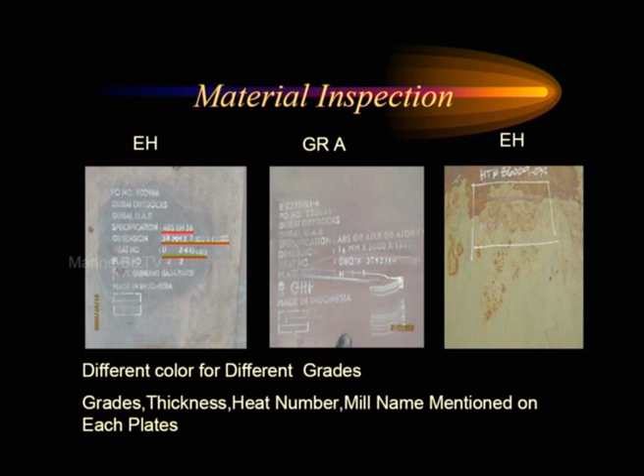Hence, we have a color code that we're instituting back into the dry dock. You noticed years ago, some of you old people here, grade A used to be red. The last couple of shipments we had come in was gray. That's going to be finished next month, hopefully. A little bit of confusion.

These are some of the instruments our QC guys use: gauges. One of the main problems we have coming out of the stores, we have a lot of pittings in the plates that are stored in the lower pods. This is the way we check it. We check the tolerances and what's allowed. Let's go.

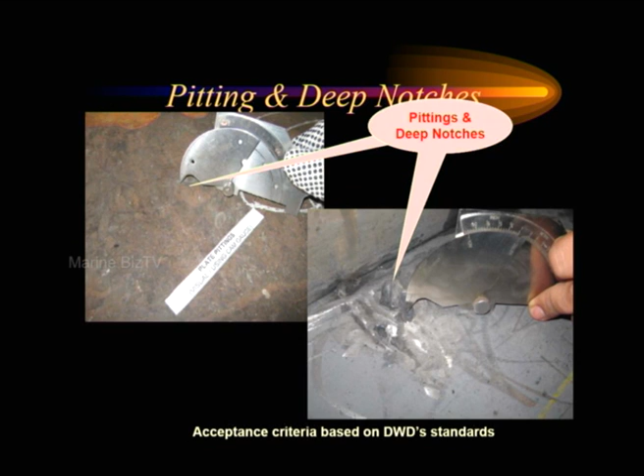We have a set of standards, as we mentioned, that we try to follow every day, and we try to make sure that you guys are aware of them. If you make mistakes, this is what you follow, guys: talk to our QC people. Our inspectors are on board every day. I'm sure they can help you out.

On your drawings, as our inspectors go aboard, check the material grade, the thickness, revision numbers are right, and see if there's any post-weld heat treatment required. Drawings are the key. Make sure you have the right revision, and we encourage our inspectors to be very vigilant with this.

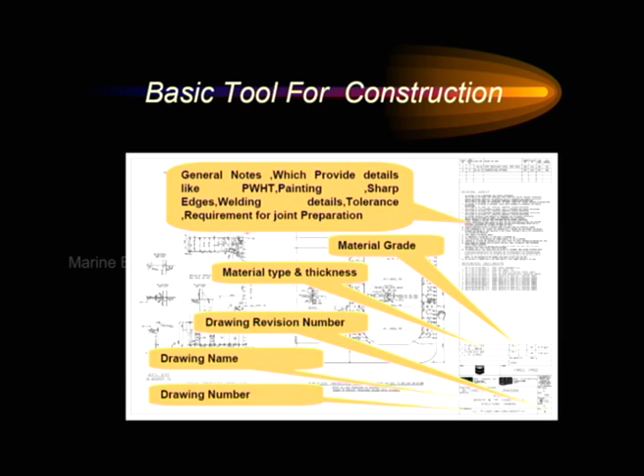Reading of drawings is very important. As I mentioned, material grade, copper nickel, could be carbon steel, could be duplex. Verification, post-weld heat treatment, NDT, non-destructive testing.

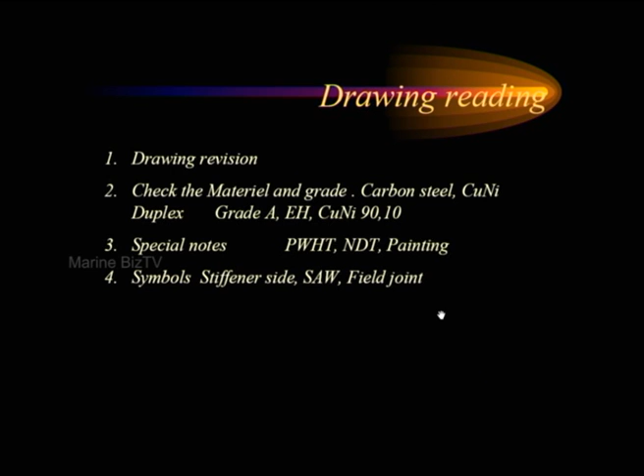Very important. And gentlemen, I threw this in there for a little laugh. When you mark a revision on a drawing, you do not have to follow every little detail. This actually happened. We usually put a cloud on a piece on a plate if there's a revision, but our preparator was pretty conscientious, don't you think?

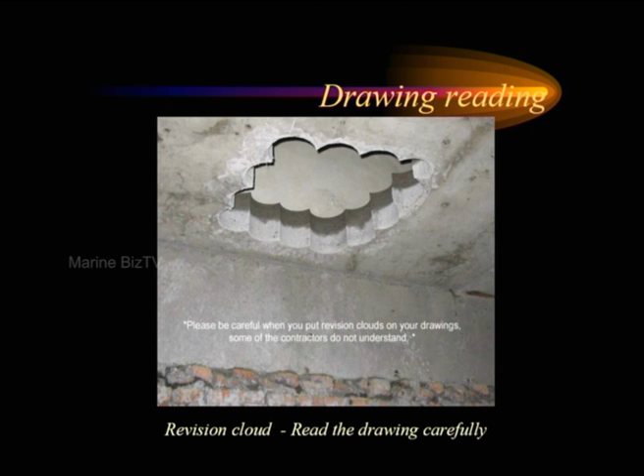This is our burning process. Notice the bevels going on the pipes, coming through the cutting stations.

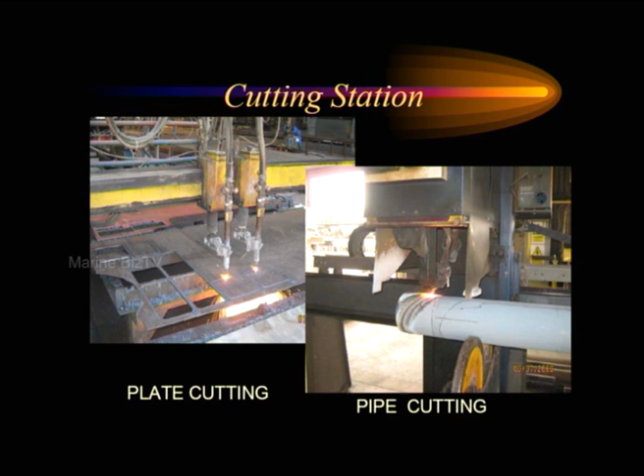There's our QC in action, doing some dimension checks. And gentlemen, this was quite an achievement. We just finished 2 rigs for Aker, and our dimensional control team did a fantastic job. I have a best fit program, and some of these blocks that went together were well within tolerance. And the overall load of that block and that unit was fantastic.

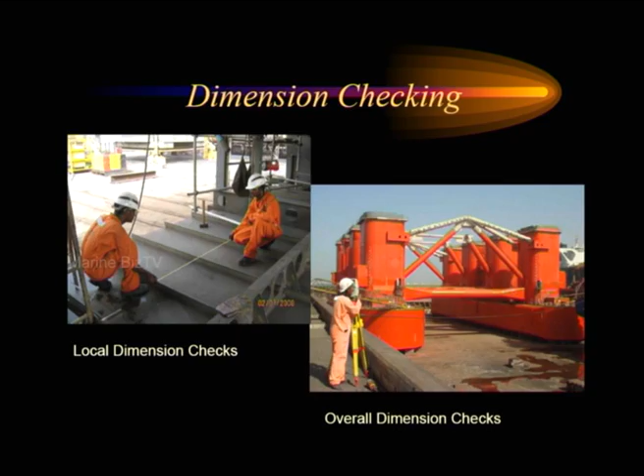Dimensional checking, as I mentioned, there's a lot of new equipment in-house now. Markings, shrinkage allowance. We're building some seismic vessels right now. We're having some problems, but we'll get it all sorted out. We have 8 of them to do. First 2, we're learning quite a bit from them. We're working with 10 and 11 milli plate. Of course, you get a lot of shrinkage in that area.

Requests for dimensional checks can be done on 436 for your subcontractors. We're here to help you guys. You have to put your hand up if you got problems out there. We know you have problems every day, okay?

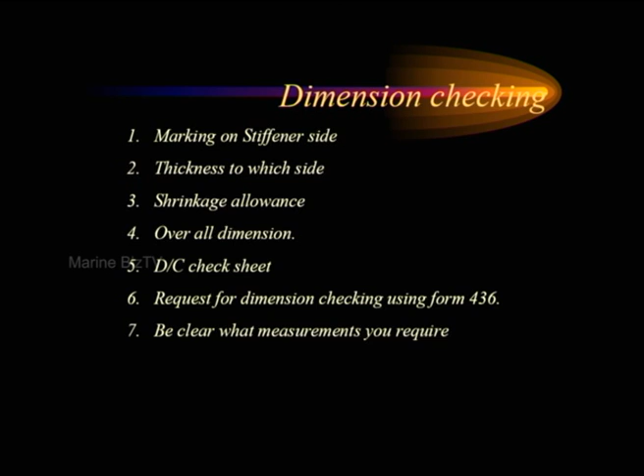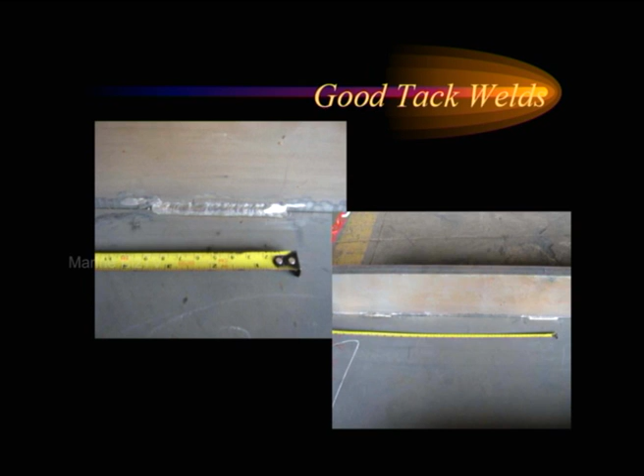Good welding is required on the plates when we're tying together. Tack welds need to be maintained minimum distance from free edge. Good practice of tacking. Notice the free edge.

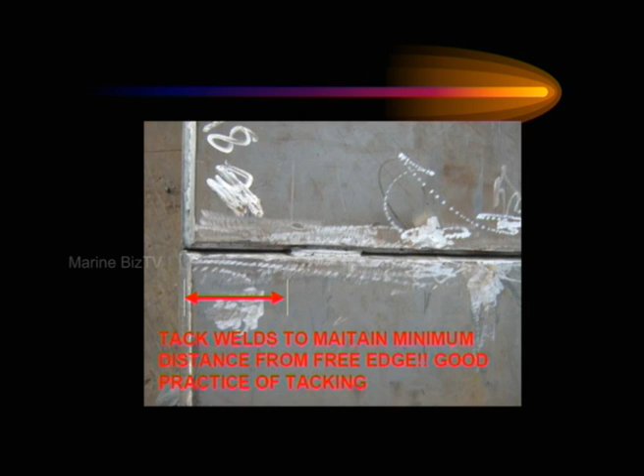Some of the tacking, our boys have noticed, is not up to scratch. I'm just showing you some examples here.

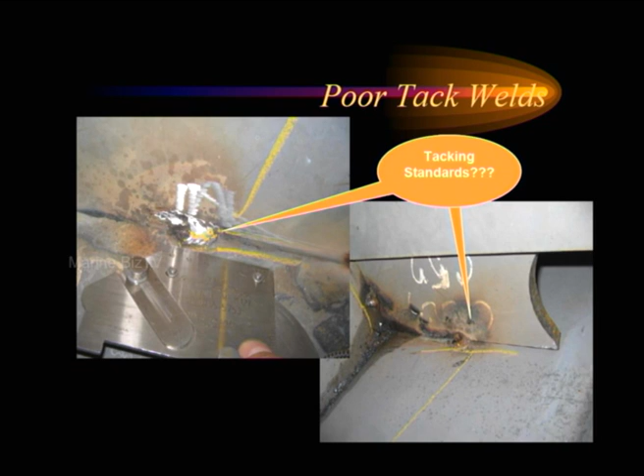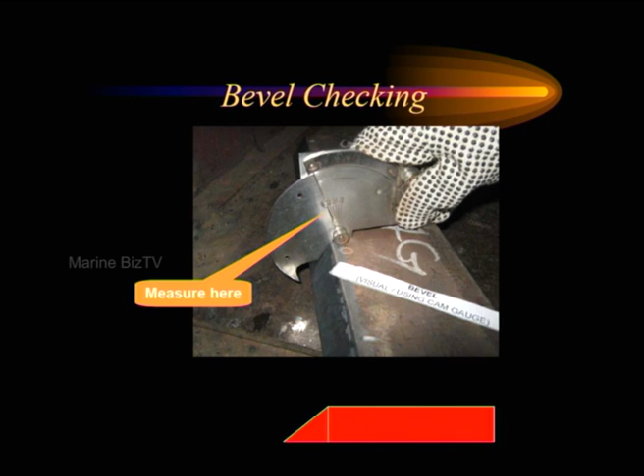Bevel checking with cam gauges. Notice the bevel. Misalignments, very important.

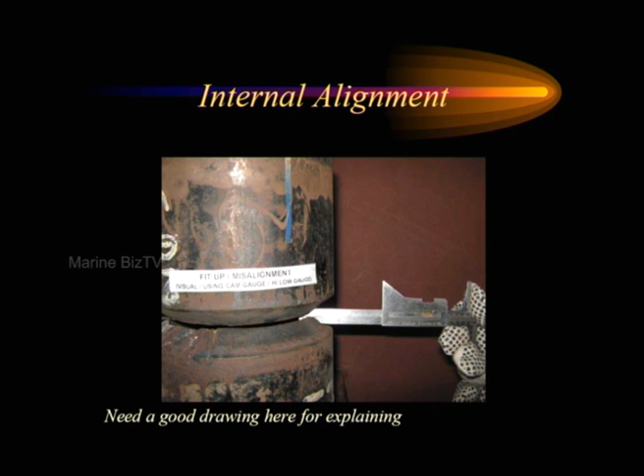Pipe, high-low gauge. Notice the bevels. The main thing about pipe, for you pipe fitters in here, is the gap, penetration. That's what QC watches. This is just one of the gauges we use. High-low gauge is called. Your companies should have them in your shops.

Again, the boys checking the root gaps. We like to close them up. Notice the rough cutting here. All kinds of things a good QC guy can pick out, eh?

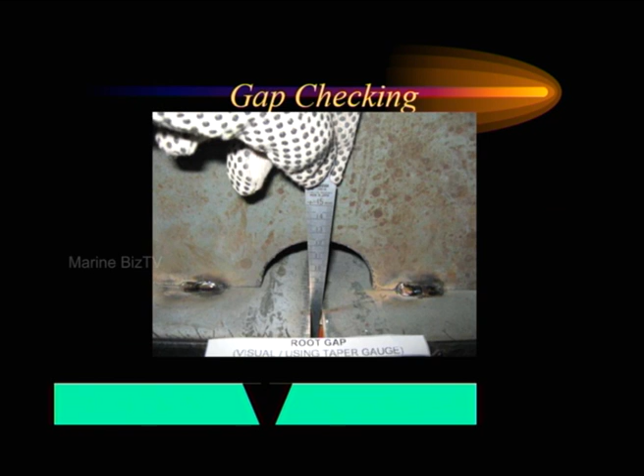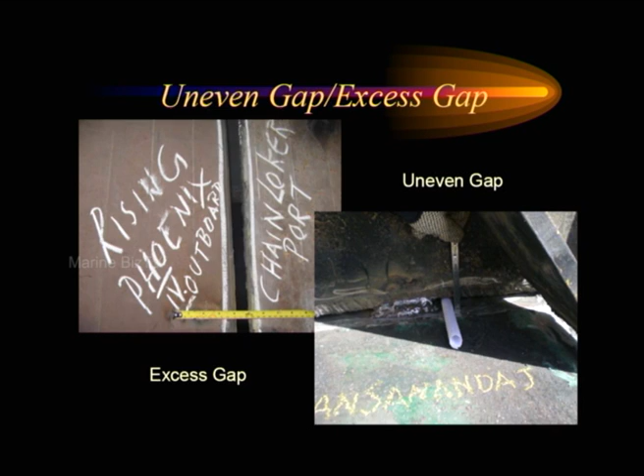Uneven gaps. Irregular, we call them. Excessive gaps. Any questions on excessive gaps, speak to our welding engineers down there. They have a new process now, working with a little bit of ceramics. So we need 5 to 7 milli gap, but anyway, we try to keep them tighter in regular fit-ups.

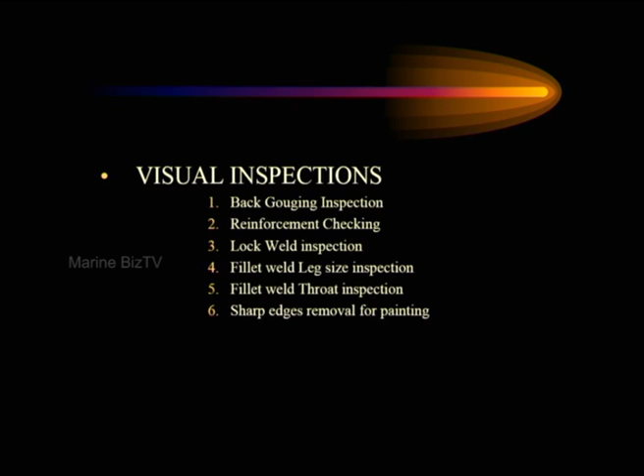Visual inspections is the inspection we do. Reinforcement, lock welds, fillet welds, sizes, throats, legs, and sharp edges, guys. The reason why I mention sharp edges, paint these days has a tremendous implication on steel work. Years ago, it wasn't so much, but now you have to grind all sharp edges. It's a big pain for everybody, but it's got to be done.

Any kind of tools to measure this? There you go, some of the welds we're getting. Bad cutting here.

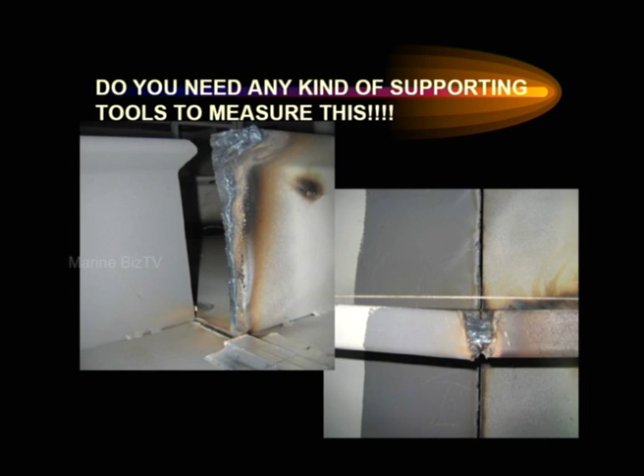Good back gouging, guys. That's one of the things QC and the superintendents check all the time, what kind of root we're getting. How deep is the gouging?

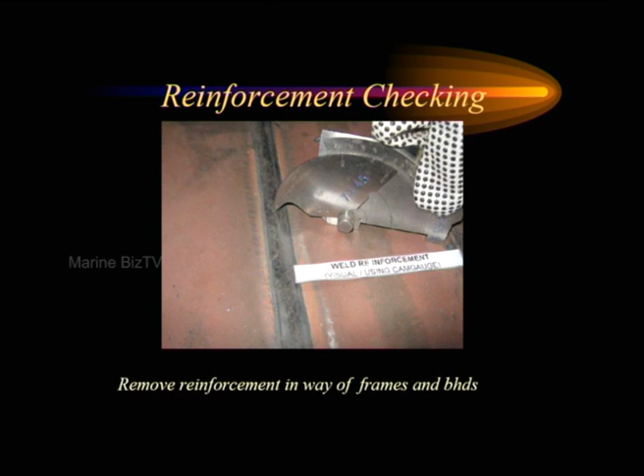Reinforcement checking on your plates. We like to have it below around 3 to 5 milli. Here's some of the instruments our boys use, checking for lock welds. Should have those in-house.

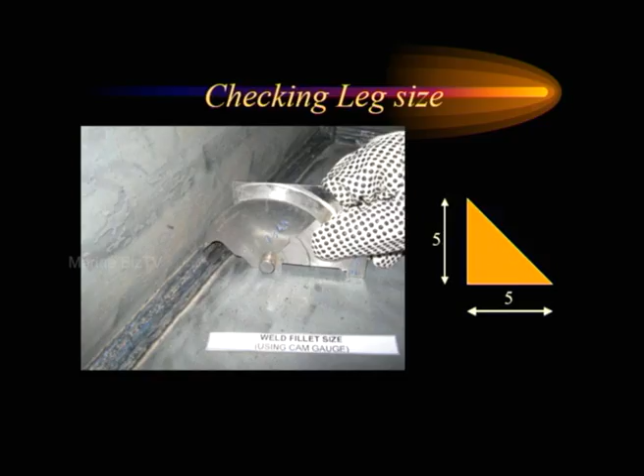Again, checking the fillet size, using the gauges. All your QC guys should have these. Very important. You've got heavy steel here. You've got about 3 or 4 runs weld here. Looks good.

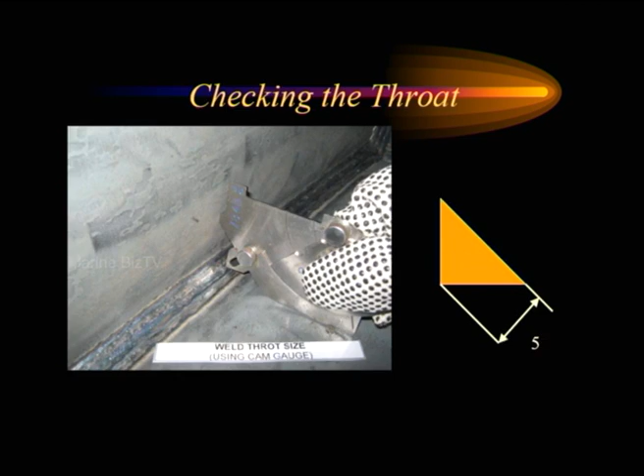Checking the throat size. Notice where he is. Sharp edges, guys, very important for paint. It's got to be clean. We can't get away from it.

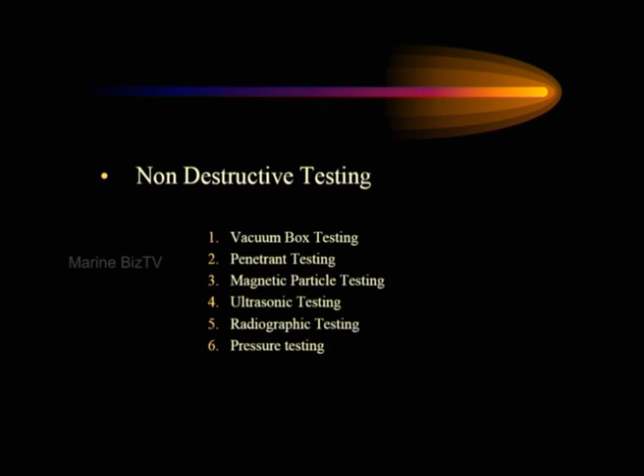NDT, I spoke about that earlier. These simple processes we go through to try to sell your work. Either a vacuum test, Penetrant test, MPI, UT. A lot of UT these days, guys. We're getting away from the x-rays.

It's all according to the superintendents, the surveyors we deal with. But there's more and more UT work being done. It's a lot better equipment out there than it was years ago. And of course, the old regular RT. And pressure test to sail the tank out, sail the ship out.

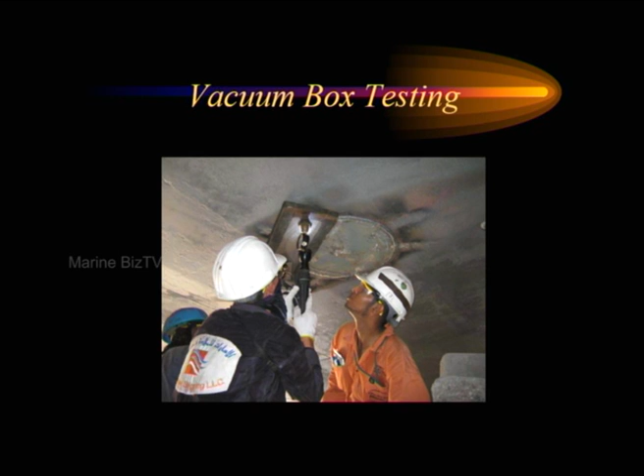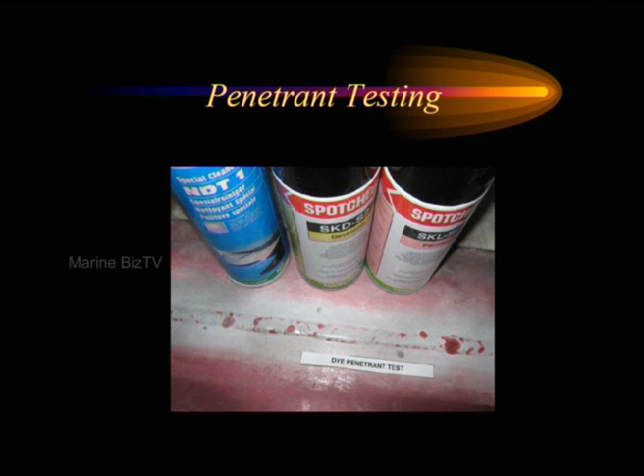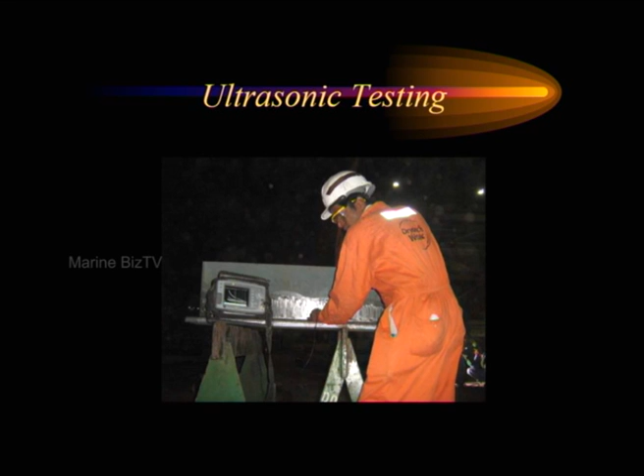Very important. And this equipment, we have, I think, 9 guys registered with the dry dock right now as UT operators, and we're expanding on that. We find there's a big market for it right now.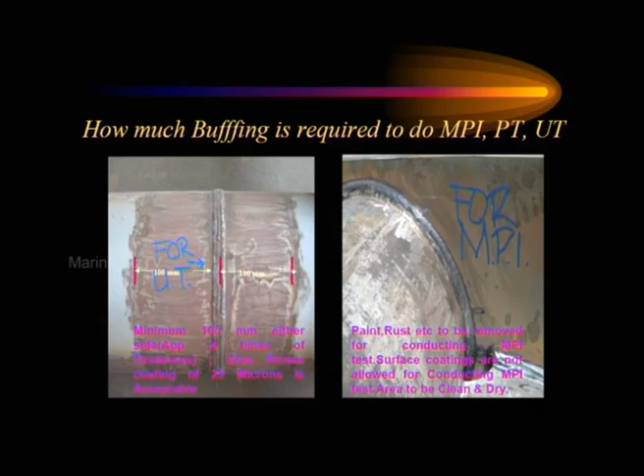MPI, what's required, and UT, what's required, away from the weld zones. UT, you need 100 millimeter, guys, each side of your weld zones. Doesn't have to be shiny, but as long as you can get the probe to move over to steel. A lot of people make the mistake, they shine and shine and shine. We don't need a shiny surface, guys. We just need the rough spots taken off so we can move the probe. It's got to be moved smoothly. That's what we need. And of course, the rust for MPI.

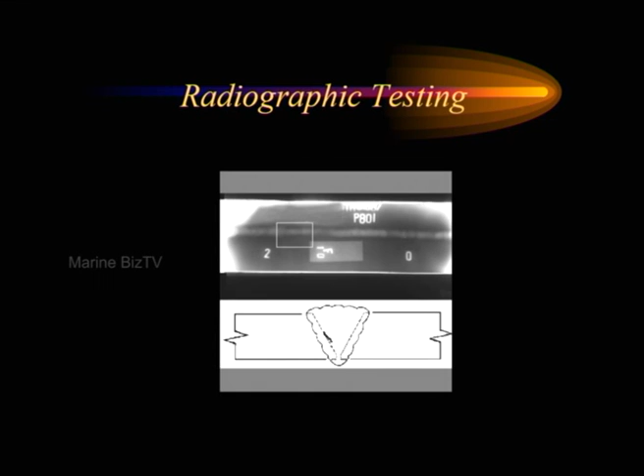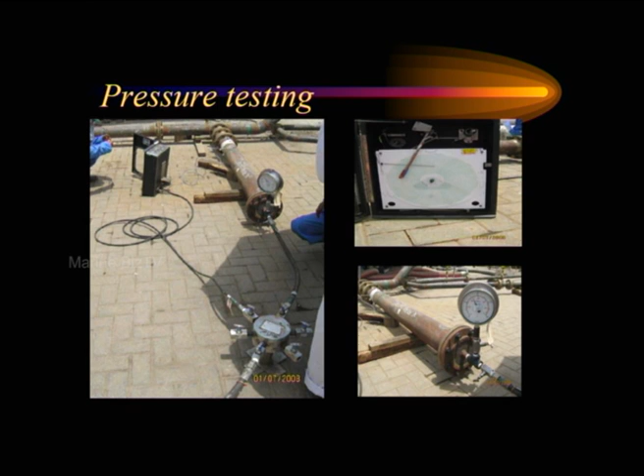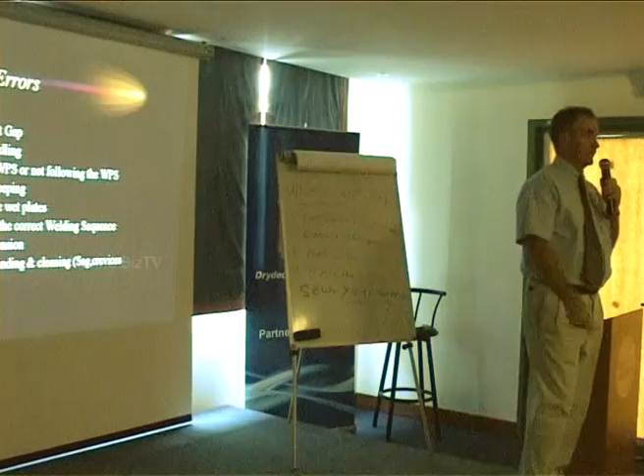I think you guys have been on some of my presentations in QC. We did 350 x-rays last year on subcontractors alone. We had a 40% failure rate. Out of that 40%, 90% of the problem was porosity. And you guys all know, it comes back to porosity is electrode handling.

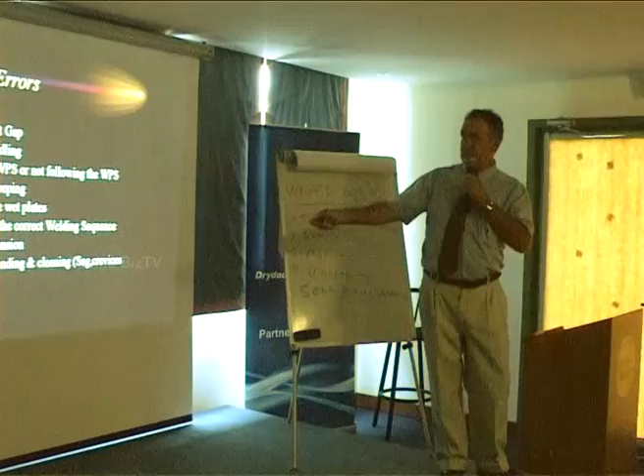Right here, cold electrodes, guys. That's one of your big problems. I think I've been enforcing it with your supervision in-house. That's what you got to take a look at. You could get rid of a lot of repairs and save yourself a lot of money. Electrode handling, hot electrodes, bake them please.

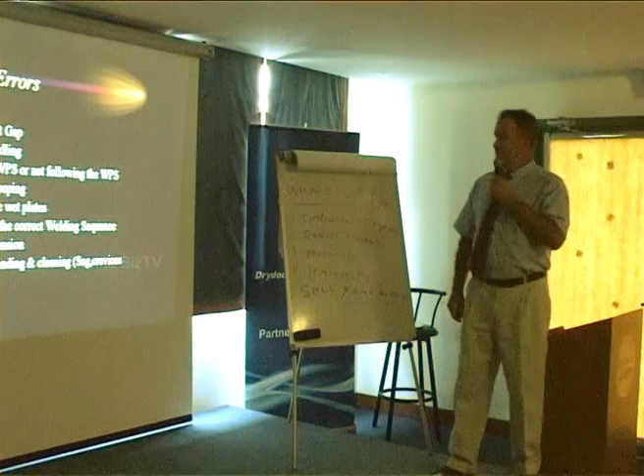Wrong use of WPSs. Poor housekeeping. Welding on wet plates, not so much in this area, but sometimes there's water, and not following the correct sequence. Incorrect dimensions and incomplete grinding and cleaning.

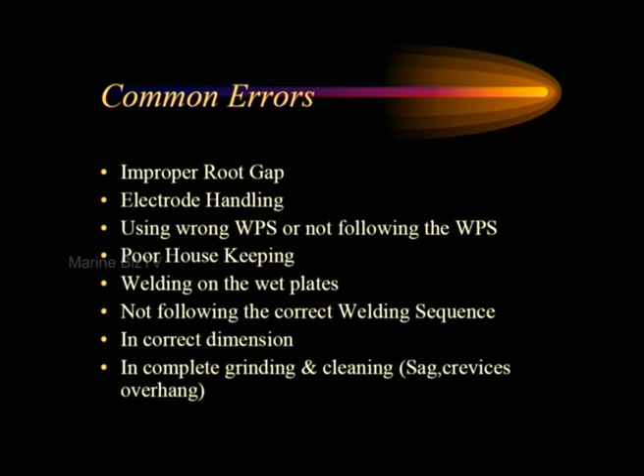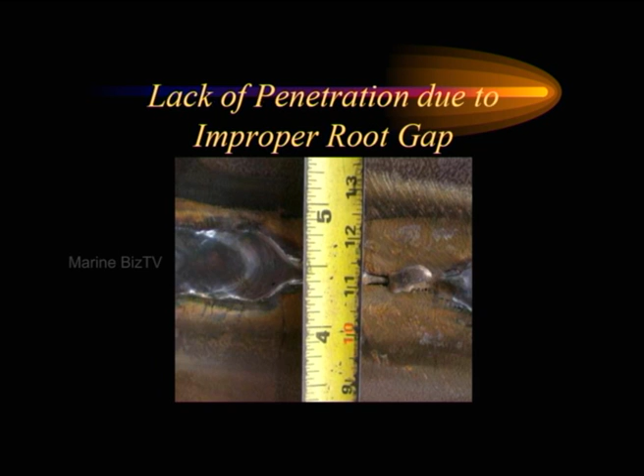Lack of penetration, poor root gap, burn through. This actually happened with use of ceramics. You had too much gap, and the bridging of the plates, the ceramics couldn't close it, and hence you get burn through. I couldn't believe this when I went down and seen it. I actually went down to see this. Like I said earlier, guys, every day is interesting. If you don't find your job interesting, don't stay with it, believe me.

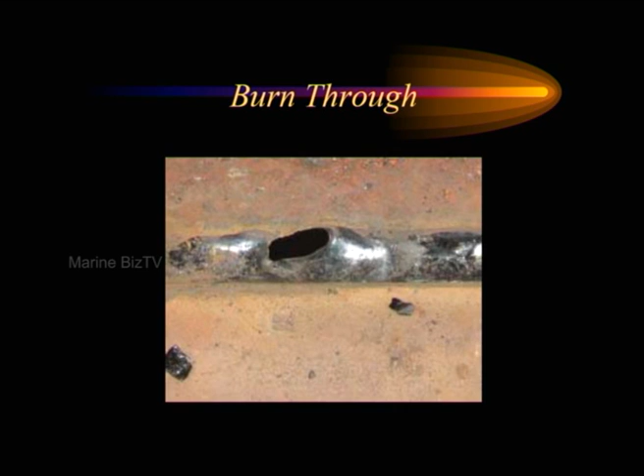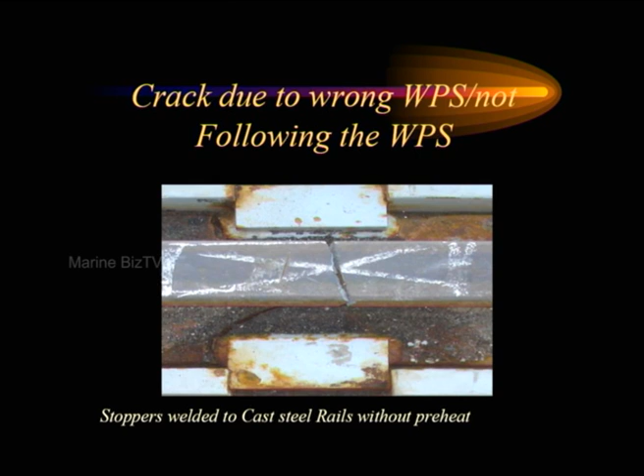I spoke about electrodes. Again, guys, this is totally unacceptable on a ship. Boxes of electrodes. We don't need that, and I'll continually hammer you guys till it changes. I just need your support. It's not that difficult. Make the guys use the proper equipment.

It comes back to your supervision, and it's up to you guys. You drive it. It's hard for us to sell this when you've got a box of electrodes in the tank and an ABS surveyor comes in and says, Kevin, what's going on here? We have to answer to these people. We're on the front line. I run across it every day. I hate bringing you guys in the office, but some days I have to.

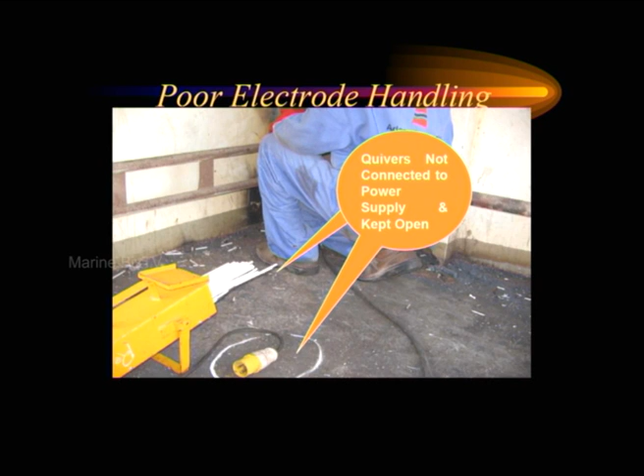Again, you see, a proper quiver, but not plugged in. Why? Where's the supervision? First thing, you got 10 welders underneath you guys. QC might come down, but QC also has to make sure it plugs in. It's no good, guys. You're halfway there. Let's put it that way.

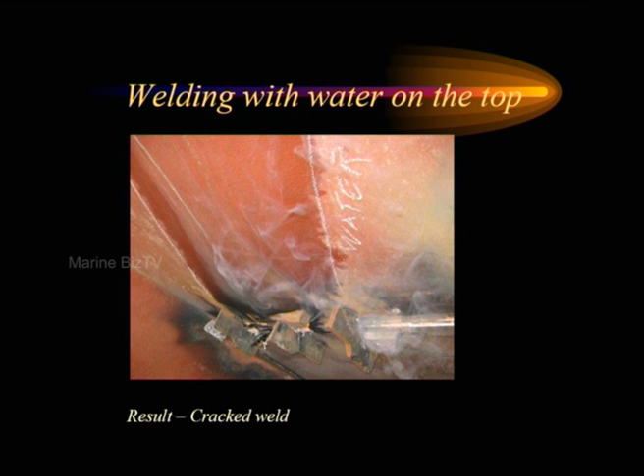And here's a guy welding with ceramics, and of course, there's water on the deck. You know what happens there, gentlemen? It's called a big crack.

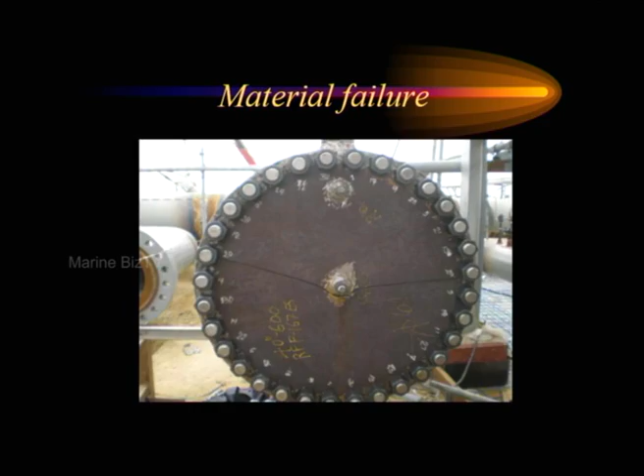Gentlemen, that's it for my presentation. Hopefully you got something out of it.

And always remember, our QC guys, I think Sergeant mentioned this morning, we have 150 guys on staff. We have all disciplines, and they're on your vessels every day. They're there to help you. We're doing tremendous work with you people in the dry dock. We're educating your workforce. We're bringing you in for an hour, once a month, every couple of months, to different institutions. And please do more of that.

Once we give you guys the information, supplying you guys with standards, get the message down to your people. I think that's what's lacking. Gary touched on it. Communication, communication, communication. This business is easy to work if you communicate. We give you the information, but get it down to your people. Any questions?